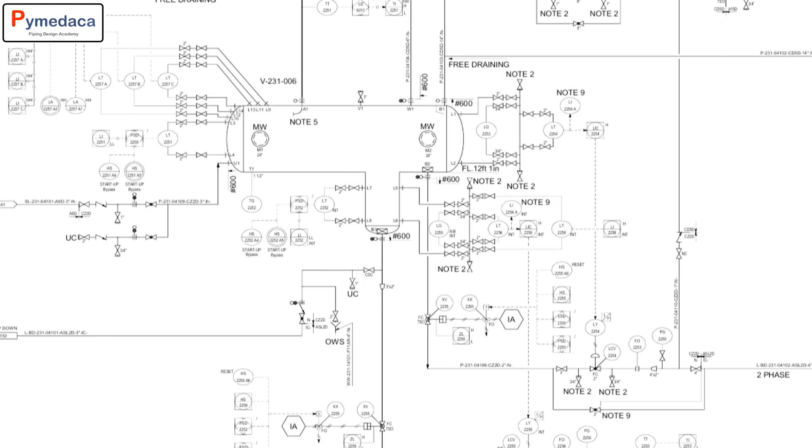But jobs are not like that. In jobs, you have to deliver. If you don't deliver, you're not paid. In order to deliver, you should understand how this needs to be converted into real-time applications. For that, you need to understand the nature of work. You need to understand how you can convert the design into real-time usage in order to meet the client requirements. You simply can't do some preparations based on some interview questions in order to become a piping design engineer. You really need to understand the real-time application.

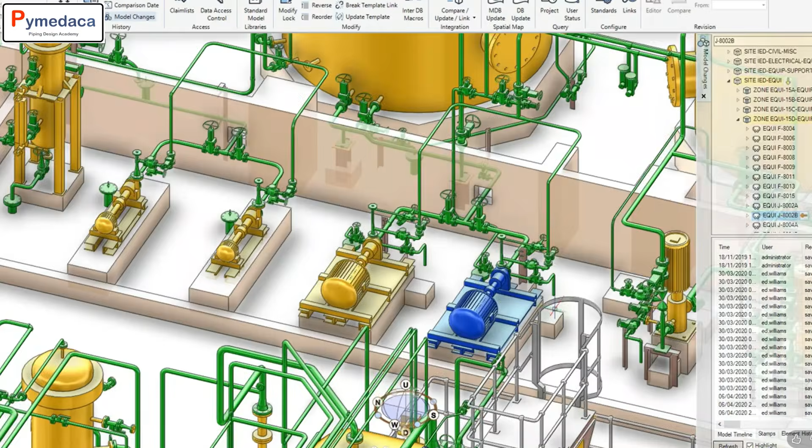Reason 2. Relying on softwares. This is one of the biggest mistakes most beginners continue to make, thinking that learning the software means learning everything about design, that software is the only way to become a piping design engineer, and software will do everything in design. This is not true. Software is just a tool. Maybe we could say it is computerized and automated, and it will give you a better reflection of your ideas. It will help you to prepare the drawings quickly and to prepare the 3D model quickly.

But being a design engineer, you have to understand the problem, you have to find the solution, refer the international standard, and then produce a design. Softwares cannot produce a design. Softwares can only reflect your design.

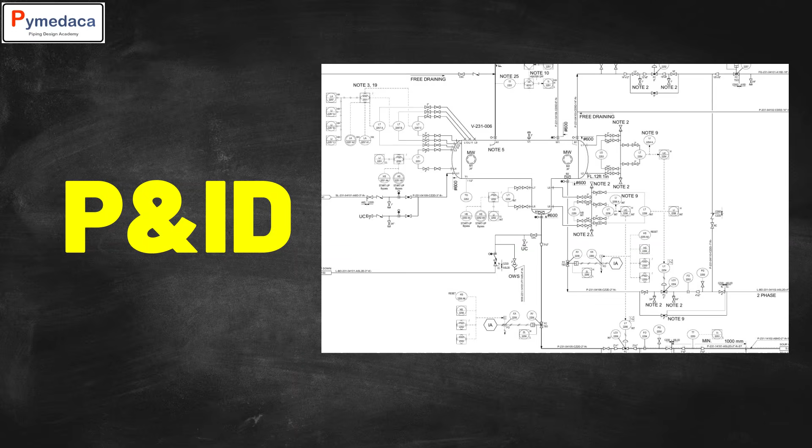Reason 4. Not having practical knowledge about the work. You simply cannot go to a job having only theory knowledge. In a job, you have to deliver. In order to deliver, you should know the sequence. You should understand the workflow. You should understand how to read a particular input, how to read a P&ID, how to read a PMS, how to read a plot plan, and how to convert a particular input into a design and then into a drawing. You have to understand the execution sequence. All these things are important in order to efficiently execute the work. For that, you need to have practical knowledge about the work.

Reason 5. No site exposure. Most beginners have no idea about construction issues, fabrication issues, and field constraints because they never looked into the other side of the design. Construction knowledge is very important to develop a good design.

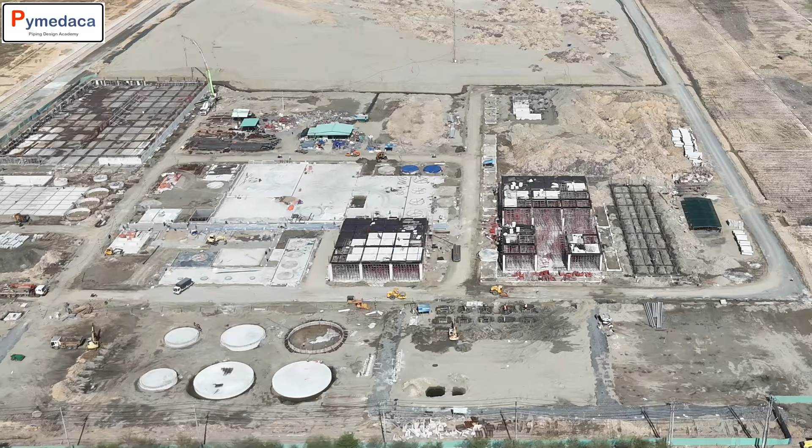If you don't possess the construction knowledge, you won't be confident in your design. But at the same time, if you have a little bit of construction knowledge, you will confidently say that your design can be implemented at site, because there are conditions where you feel like providing a support at one particular location. But in actual site conditions, it may be clashing with a cable tray or any other structure. So it may not be possible in actual site condition. So that is one of the reasons why thinking from the construction perspective is far more important for any design engineers. Now let's see how to fix this.

Number 1. Being unrealistic about the job requirements. For this, go to the job portal, try to understand the real-time job requirements, make a list of requirements on a paper and try to get into a discussion with experienced people or your tutor or your friends and try to understand how these things work actually in a real-time job. Ultimately, end of the day, you need to understand how these things are important in the actual job.

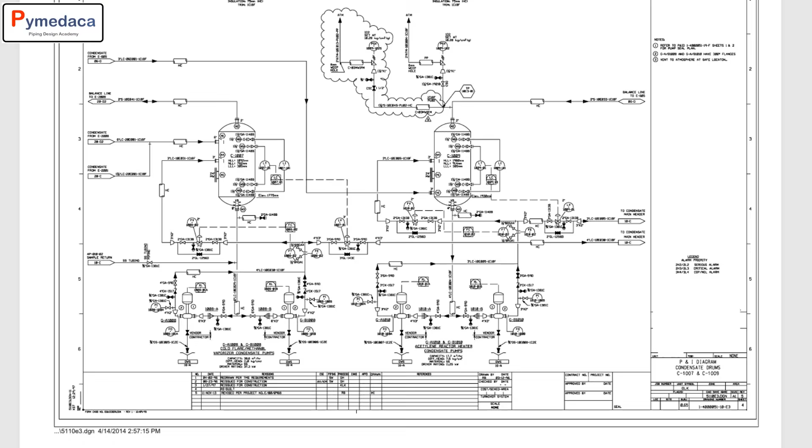Number 2. Relying on softwares. In order to fix this, you need to understand how the design execution works. You should understand the workflow. You should know how to read the P&ID, how to read the plot plan, how to read the PMS, how to convert an input into a drawing and to a design. You should understand the sequential workflow.

What is one after the other? What is the first step? What is the last step? What is your actual process of developing the design? All these things are very important. You will be able to get this information by speaking to experienced people, or you can get it clarified from your tutors, from your institutes.

Number 3, not understanding the why. You should ask lots of questions to understand why you are doing a particular design, why you are meeting this requirement. Ask as many questions as possible. Even if it is a stupid question, you have to ask, because you need to clarify for yourself. Only then you can develop the design. If you shy away from asking the questions, you will not be able to get a clarification about that particular issue, and you will continue making those mistakes. So please ask questions and try to understand why you are doing a particular activity or a design.

Number 4, no practical knowledge about the work. For this, you need to buy a course that gives you practical knowledge and practical experience. Do not buy some cheaper course where you can only read about the theories, because nowadays theories are available everywhere, in YouTube, in articles, in books, and so many things. But what is not available is the practical knowledge.

For that, you need to speak to experienced people, get the right training to get practical experience, because when it goes to a job, you have to deliver. You have to deliver each and every activity. If you do not know step 1, step 2, step 3, you cannot deliver. So practical knowledge is extremely important to get into a job and to execute your job efficiently as well.

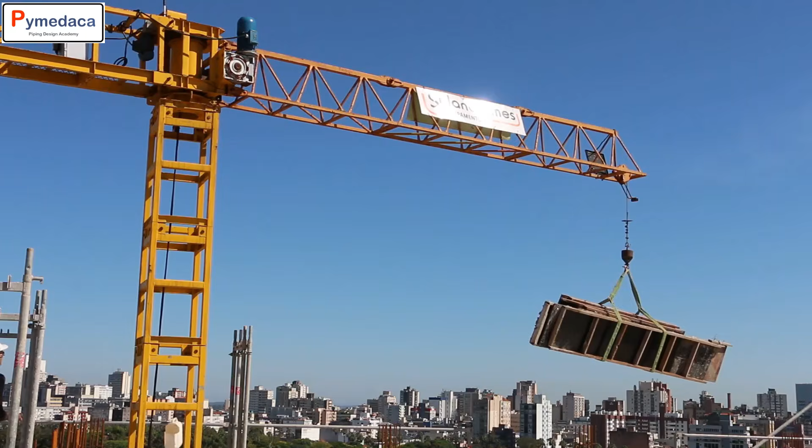But most people are avoiding the construction job just because of going to a white collar job. Please remember, knowledge is wealth. You need to understand the importance of knowledge. In order to get knowledge, you should do whatever has to be done. Because if you have construction knowledge and then you become a design engineer, you will be able to develop a great design. So these are the simple ways you can fix this issue.